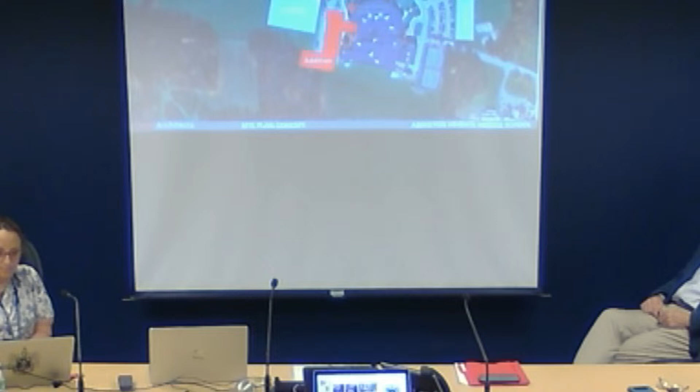So here is the site plan. This is your existing site, bird's eye view. The school's right in the center. And then this is where we propose the addition, the red box. We're building to the west of the existing building on the main drop-off parking lot that's there now. We're taking over the parking lot that is in front of the building, so we're going to have to build a new parking lot to replace that, but also expand parking on the east side of the site, providing additional parking during construction and also after construction.

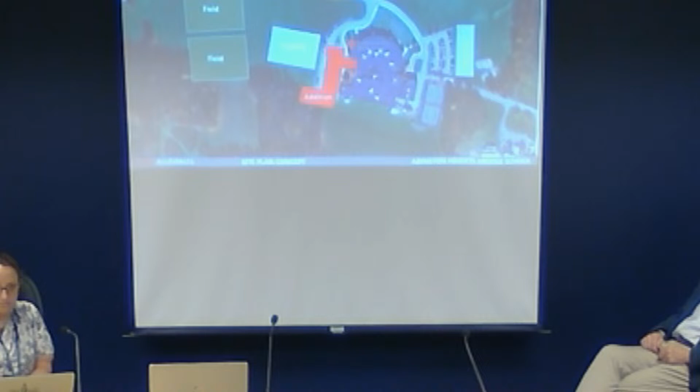And then 2 play fields - we want to use the property, the open grass field to the west of the school, and develop that for 2 soccer fields.

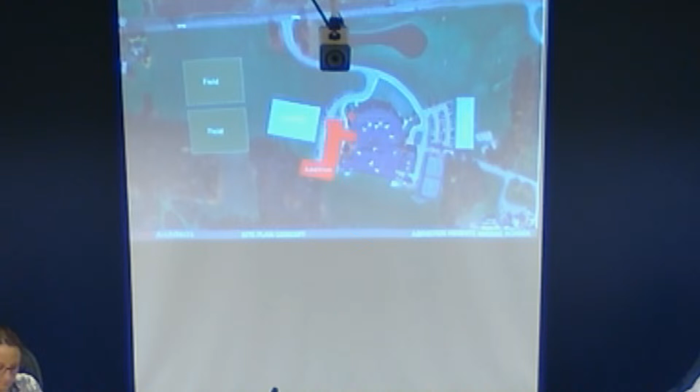And here's the sketch plan that HRG developed. Mark, you want to walk them through a little bit?

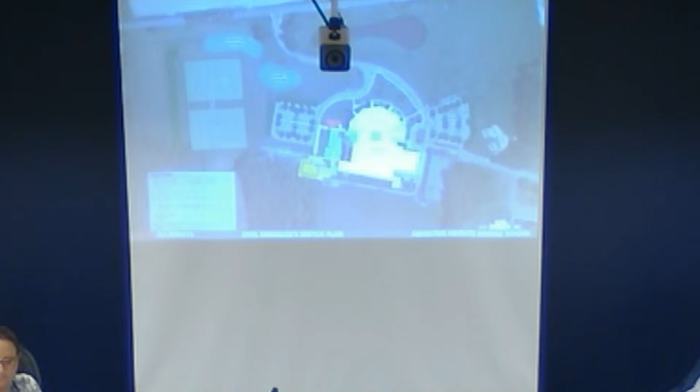To the north of that parking area, you'll see two light green circles. Those would be where we're looking at putting additional stormwater management facilities. We have that big pond up front, but that pond is really more aesthetic for the middle school, built in the 70s, stays full of water. It's not really useful for stormwater management, so we have to add some more conventional basins to meet modern stormwater regulations.

In addition, for the two soccer fields, we plan to make space within the basins so that if one of those fields gets turfed in the future, that's accounted for now. I don't know that that's proposed at this juncture, but in the future, 5, 10, 20 years, whenever, if that would be something the district desires, it would be baked into the design.

In addition to the additional building coverage that would come from that future expansion area I talked about when I first started introducing the plan. So that's the long and the short of it.

On the front side of the semicircle, where the roadway comes around, there's a bump out there that's not there currently, for bus offloading or pickups, for whatever use the district needs for sports or just daily drop-off and pickup.

And that parking area on the east side of the building, we're planning an additional connection to the road that goes up to Newton Elementary School. So instead of just a single in and single out parking lot, which does get congested at times for sporting events, there'd be two ways to get in and out of that lot, which will make a big difference if you've ever been there when the lot gets jammed up.

The final piece is the access - we plan to more formalize the access road behind the existing middle school. You can see that gray line at the very bottom right there. That will formalize access a bit better around the back of the building, to the power plant part of the building where all the mechanicals are, for easier access into the future.

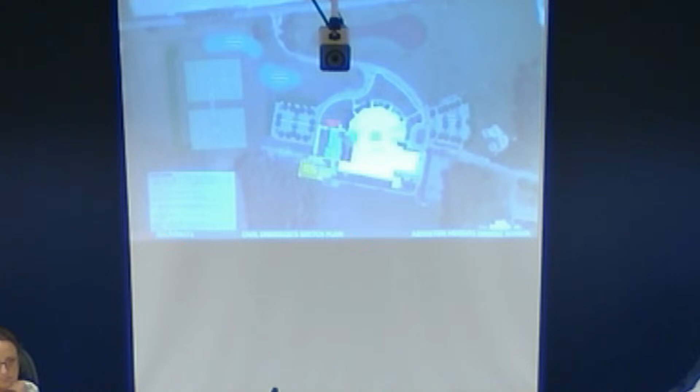And we really want to develop that access drive going up past the elementary school, likely going out that way, with the circulation being more of a one-way in off the top of the screen, going over to the elementary school and then coming out.

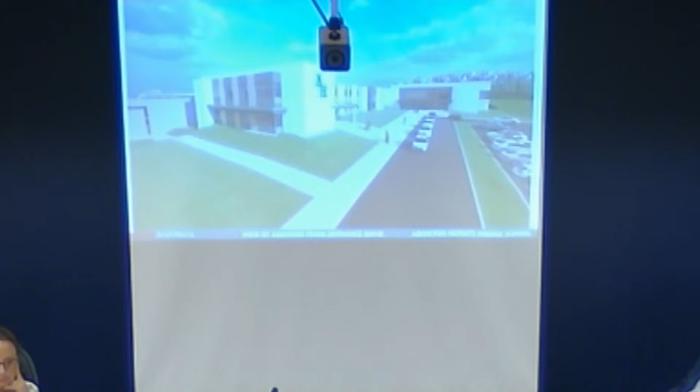This is a rendering of what the addition would look like. On the left is the existing building. Right in the center with the AH on it is where the main front door is - that's administration and STEM on top. In the back is the new gymnasium, with a large lobby to enter it. Connecting those two boxes is the new academic two-story classroom wing.

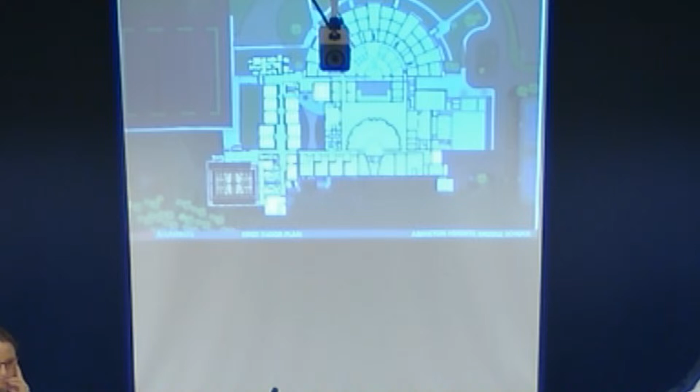We're adding 10 classrooms on 2 floors, so 20 classrooms, supporting the 2 grades that are going to move over to this area. We're also building 3 STEM rooms to really develop the STEM curriculum for middle school. There's a large gymnasium, I believe it's going to be the largest in the district, along with support facilities including new locker rooms and bathrooms.

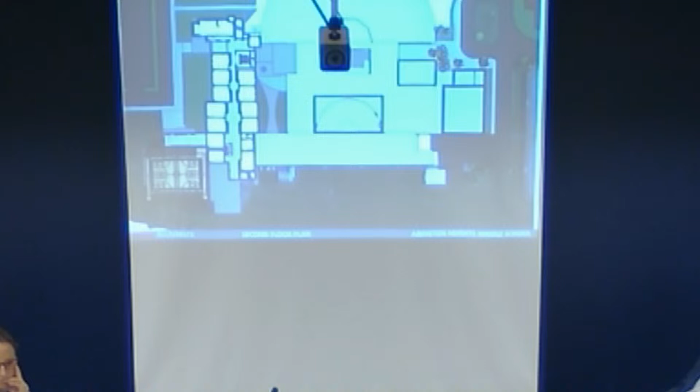The second floor is very similar to the first floor. There's the academic wing on the second floor, going from north to south, and on the top end are 2 of the STEM classrooms, which we'll show you a little bit more in a little bit.

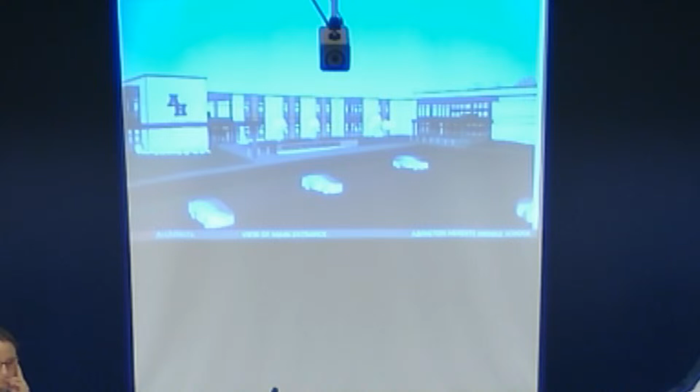This is an enlargement of the new administration area.

On the bottom of the screen, you see a large vestibule that goes into the lobby. The vestibule is where the students would come in and out at the beginning and end of the day. Once the day starts, those doors are locked, and all visitors need to come in through the secure vestibule, just above that. That's a locked area so that security can vet who's coming in and out of the building — it's where you would have your lobby guard or system to check and background check people, getting them vetted by the receptionist before they come any deeper into the building.

It may be that some parents are just dropping something off, like somebody forgot a book. They can just drop it off there. We really want to control and limit who comes into the building during the school day to really avoid those types of security issues that might come up by having visitors in the building.

Now, if they need to come in further, there's a door that they would be buzzed into the reception area. They might have a meeting with the principal, and go back to the principal's office. There's also a conference room up in that area. A lot of times the interaction with parents is going to happen in those 2 spaces.

And then if the visitor needs to go further, there's a door from the reception area that goes into the lobby that gets you into the rest of the school. So once you're vetted and past that point, you can go into the rest of the school and see who you need to see. The rest is support space.

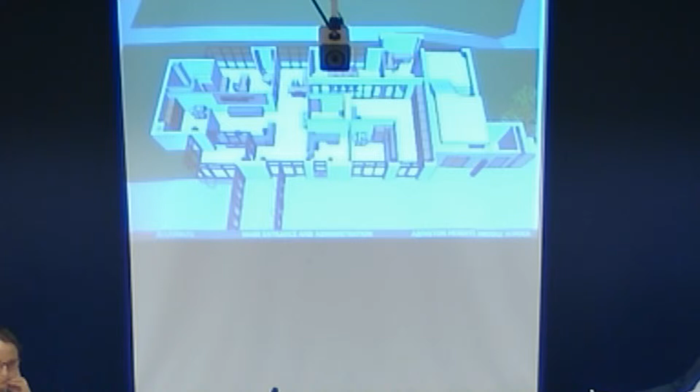This is the first floor main academic wing. The classrooms are going from left to right. There are 10 total rooms. Most of them are standard classrooms, and there are 2 larger rooms — those are the science labs.

We are connecting the building with the 2 main corridors that come from the existing building. Basically, where you enter the building now becomes a new corridor into the new lobby to enter the building. And at the back, there's a corridor that runs behind the stage along the specialty rooms, and that hallway would extend into the addition as well, lining up with the lobby for the gymnasium.

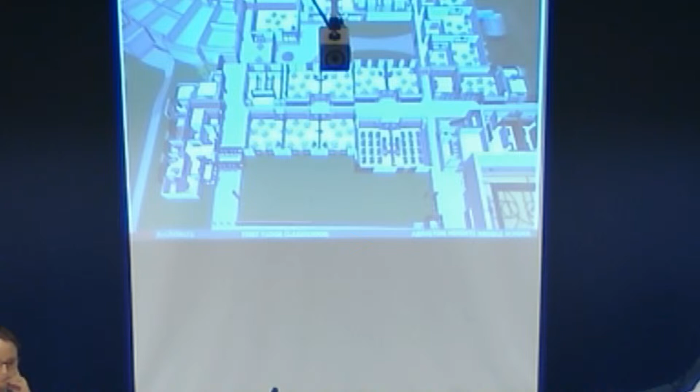The gymnasium — we're planning on an 800-seat middle school gymnasium, so it would have a main court and 2 practice basketball courts, plus a main volleyball court and 2 practice volleyball courts. The bleachers are shown in this model; obviously they would retract against the wall for PE classes during the day. This is more the setup for when you're having an event in the evening.

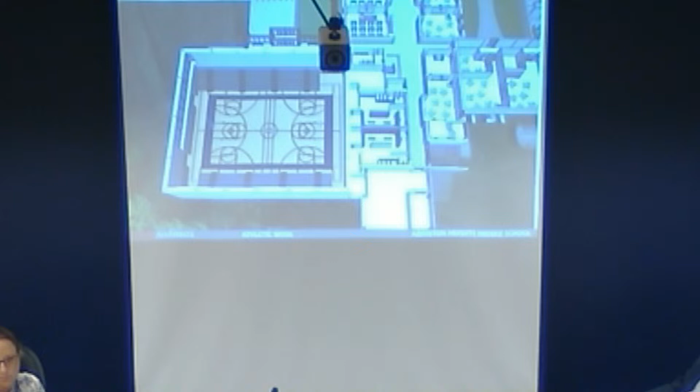To the right are the 2 locker rooms that support the gymnasium. These are designed primarily as team rooms, so for team sports, a lot of that activity is going to happen out of this space. We already have another gymnasium in the school, along with an auxiliary gym and locker rooms associated with that, so this is in addition to the athletic facilities already in the building.

Life skills room, one of the areas that we are renovating, is this area here. This is located right where the current administration offices are.

They are moving into the addition at the new front door, and so this space becomes life skills. We've talked to the administration about how to fit this out. Really want a large, flexible space that you can use in a variety of ways. Have a kitchen environment so that the kids can learn how to cook and do those type of tasks. Also an apartment setting, so there's a sofa and bed and things of that nature, where they have a real world setting where they can learn things they need to do for regular life.

There's a few other small rooms around that. There's a storage room, need to put a lot of stuff away for these students. Directly in front of that is an SRO office, so we want to have your security officer central in the building, have a place to land. It's right next to the cafeteria, which is a great place to monitor what's going on during the day. In reality, that person is moving around the building constantly throughout the day, but they need a place to safely secure things and a place to put their items. And then there's a bathroom associated with that as well.

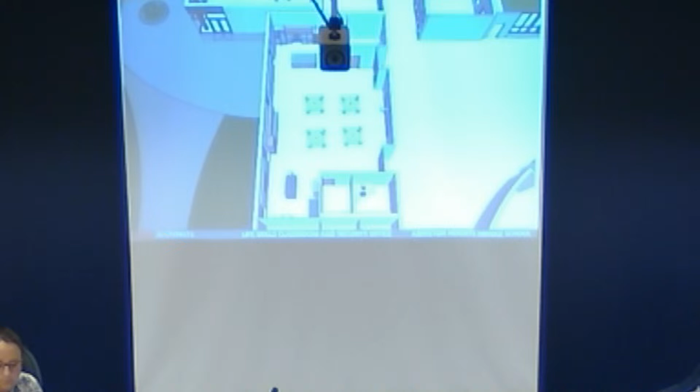The second floor is very similar to the first floor. There are the 10 classrooms going from left to right. The big difference is on the far left is the STEM labs. There are 2 STEM labs on this level. They are above the administration area. We can show you that a little in more detail in the video we're going to show shortly.

Can we also add that this is an assistant principal's office? We made a decision to diversify or spread out administration, so we have a vice principal's office on this floor. On the right side there, right next to that is a TPC, which is a teacher's planning center. So this floor has, those teachers have a space where they can get together and plan out their team activities, and directly beside that is the vice principal's office. Really like to keep somebody's eyes, administrative eyes, up on that floor.

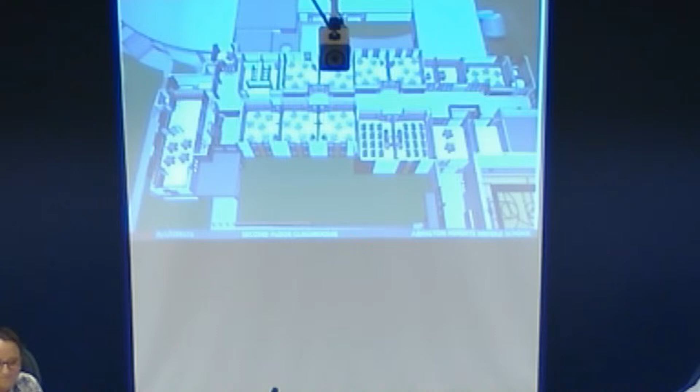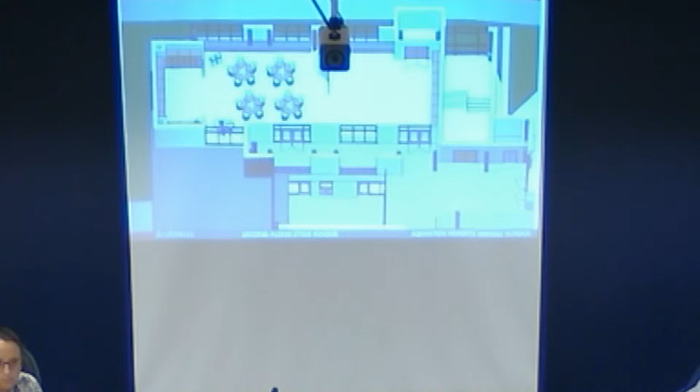This is that STEM lab on the second floor that's above the administration. Developing it as 2 spaces with a divider so that it could be opened up into one large space, putting the permanent equipment, the storage, around the perimeter, and keeping the center of the room open. As STEM develops in the district, you're going to have different activities that you can do within that space. The key is we want it flexible. We want to be able to modify and change as your curriculum changes for the students.

And we've been thinking also about phase 2 for this project. So this is showing on the left side a potential phase 2 addition, which would move 5th and 6th grade out of the half circle over to this area as well. We want to plan that now so that when Mark and his team does their work, we're developing the site so that we're not building something in the way for later. So we've thought through where that would be. The big idea here is we build another academic wing and we tear down the half circle.

And then we renovate what remains. So your large boxes, your auditorium, your cafeteria, your existing gymnasiums, those would get renovated in a phase 2, so that at the end of that phase, you basically have completed the entire building, partial renovation and partial new.

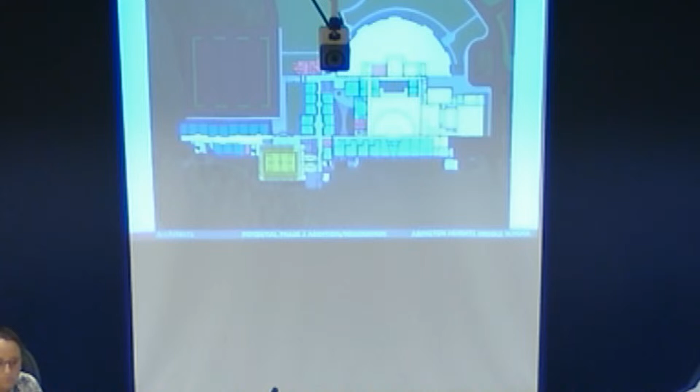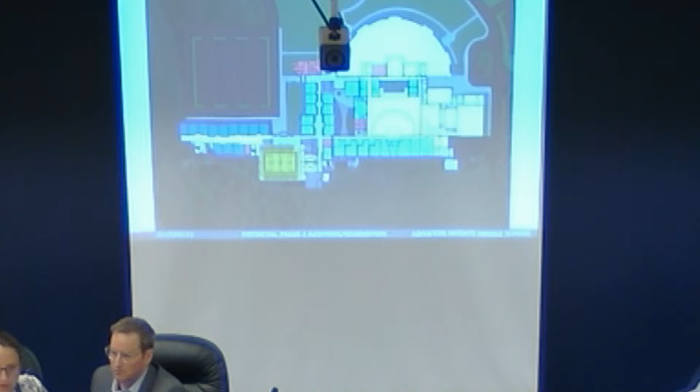That's my presentation. I also have a movie that we prepared. Real quick, just one second. Let me just go back. I'll show you which one. Can you tell which classes are being renovated with phase 1? Yes, go back there to those 4 classrooms. Go back, hold on for one second. Go back.

Side 2. I did gloss over this. There are some rooms colored purple, not gray - might not show great in the video. That's where we're doing renovation. One of those was a life skills room, which I showed you. The 4 on the bottom are 3 art rooms, a learning support room, and a small group instruction room. That area of the building we are renovating as part of this project. But most of the gray is very, very limited renovation in this phase. The majority of the project is the addition, and there is some area of the building we're renovating.

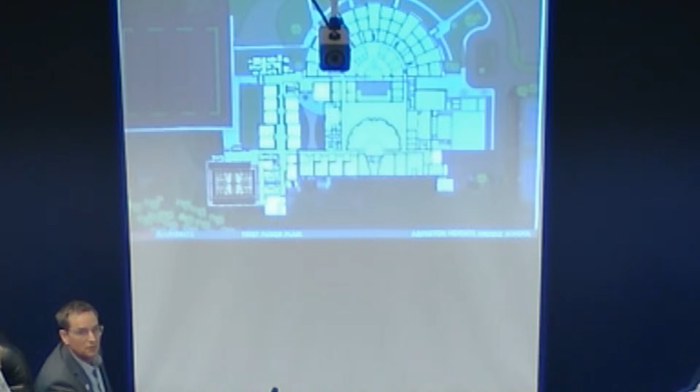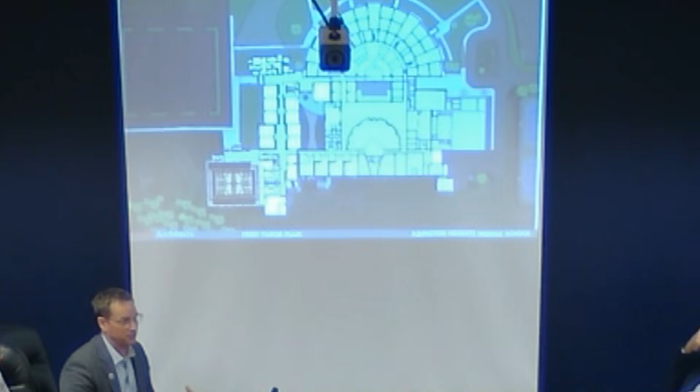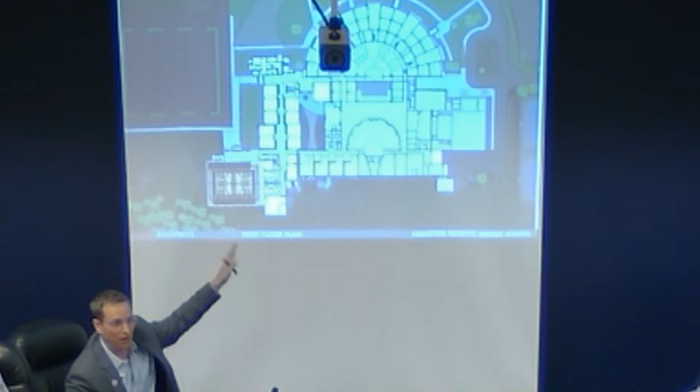So to be clear, and you can correct me if I misrepresent - what we have here in the very light blue is high renovation, correct? Correct. High renovation essentially is tearing it down to the studs. So when you hear renovation, to me, I call that a complete renovation. When we take the high renovation area and then the new adds, what we end up with is 85,000 square feet - take South Abington, park it in front of the middle school, take Newton Ransom, bricks and all, park it in front of the middle school, and then take all the K through 4 space at Waverly and park it there. That's the scale of what we're talking about.

This is a 70,000 square foot addition onto the school, and also partial renovation as well. It's a large addition. As Chris said, it's the size of several elementary schools if you want to look at it scale-wise.

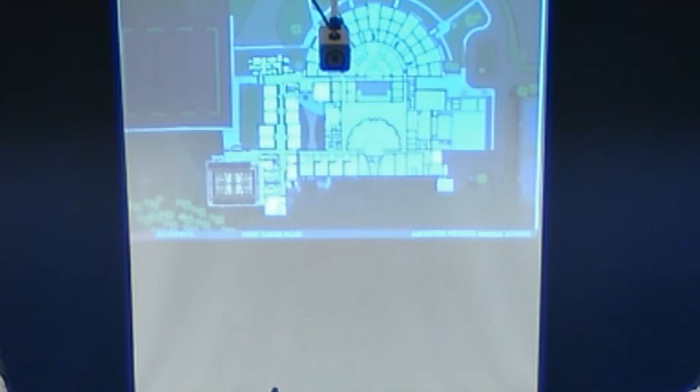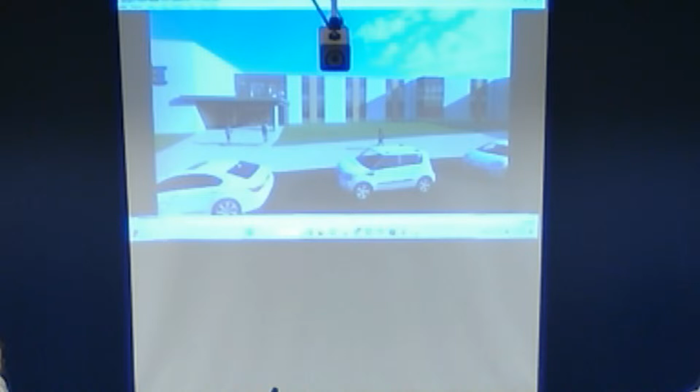We prepared this video to show you some of the spaces in more detail.

This is the approach to the front door, the new front door of the addition. All the students being dropped off by their parents come up through this entrance. This is the lobby right inside of that. Administration's on the left. If you go straight, you go down into the existing building. You go to the right, you go down the academic corridor.

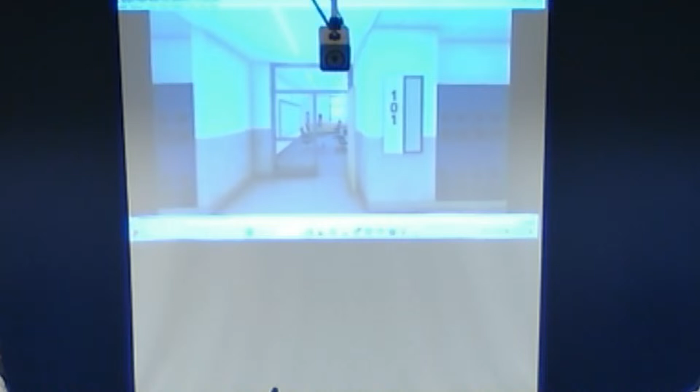This is showing one of the classrooms. They're all designed very similarly. We want that flexibility so that no matter what the subject is, you can teach it in the space. The teachers can move around very easily from room to room.

Approaching again from the outside to the gym lobby. This is coming up to the athletic area. And then from the school, this is the lobby of the gym, showing what the fit-out might be. All these things are still to be determined. That's where your visitors for sporting events would come in.

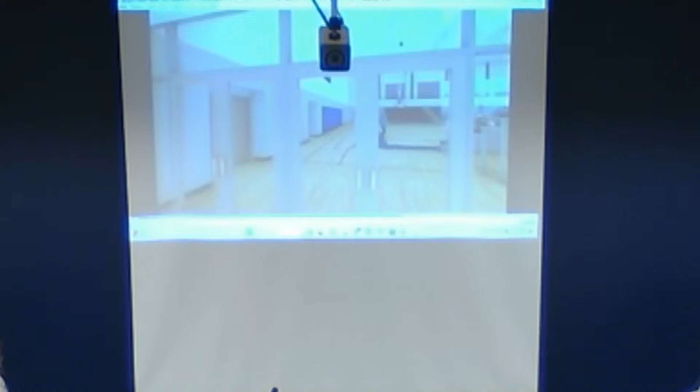And we also have this video going through the gymnasium itself, showing the size and some of the features of the gym with the bleachers on the side.

Fire away. Can you go back to the field side? Yeah, I do want to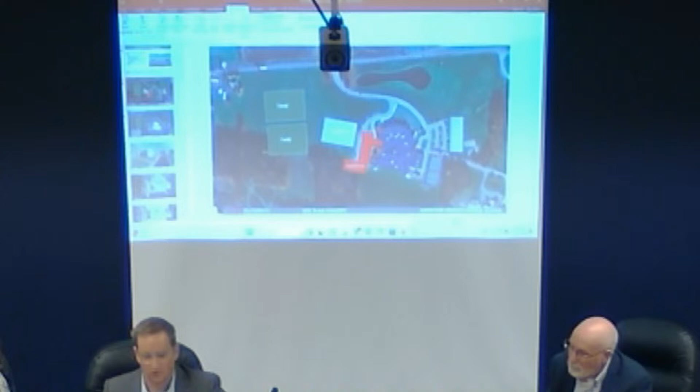mention one thing right here. So the board has talked about over the past year - hey, there's Orion, there's my husband.

We've talked about a stage 2. In the event that some of the financial outlooks change, and there's a myriad of ways that it can, will we be prepared to add stage 2? We've talked about it not only with our civil engineer but with our architects. We are preparing for that. So when that day comes, the site will be developed in such a way that stormwater will not be an issue, and playing surfaces and whatnot won't be an issue.

And I mentioned that because of the following - this is a great question I got before, where they said, well, why are we putting the fields over there? That's kind of built into the calculus. But when we think about stage 1 and stage 2, we're now moving the building to the west. Right now we've got kids that go this way - we don't want to bring them across traffic, we want to keep them out in front of us. So with safety as a priority, we're moving it all in that direction.

Okay, so I just want to make sure we all had that shared understanding. And then finally, as Mark mentioned - our civil engineer - one of the things the team has been working on is when we build stage 2, we'll make sure we have that stormwater runoff coming down in such a way that we won't have any issues down the line. So again, everything will be set up for this in the future.